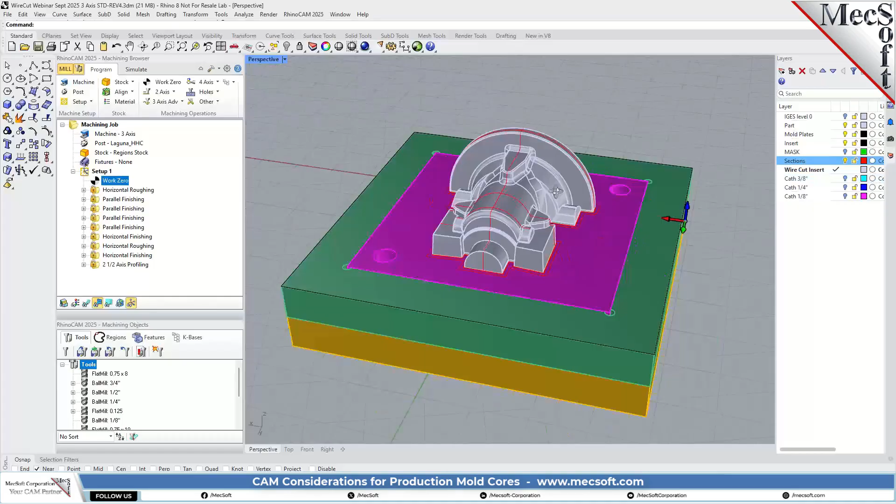Now you see that we have the same core insert. We have the insert plate with the core surfaces on top. We have the mold plates here, and I'm just going to hide those.

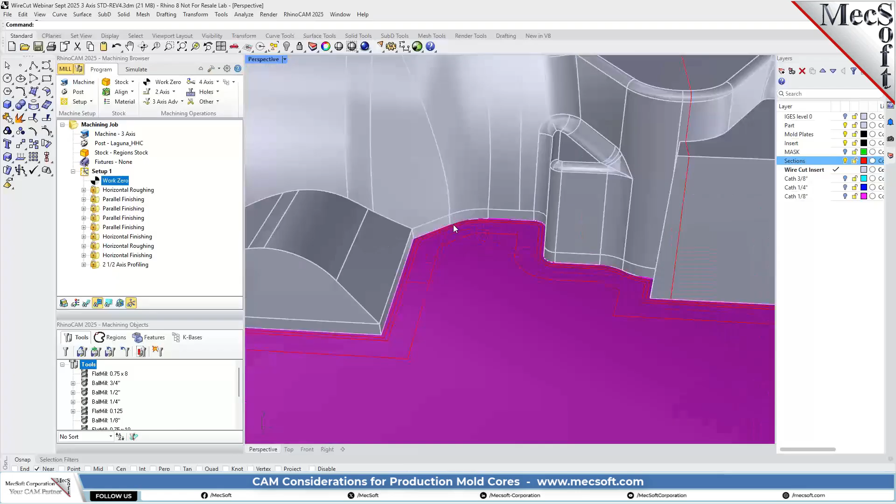Okay, so what will most likely happen for a production environment for this mold insert is that you really want to get a sharp edge there, because that's what the part requires at the parting plane or the parting line. So you really need to maintain that sharp edge. In order to do that in a production setting, you probably don't want to machine it the way we're going to machine it for the prototype.

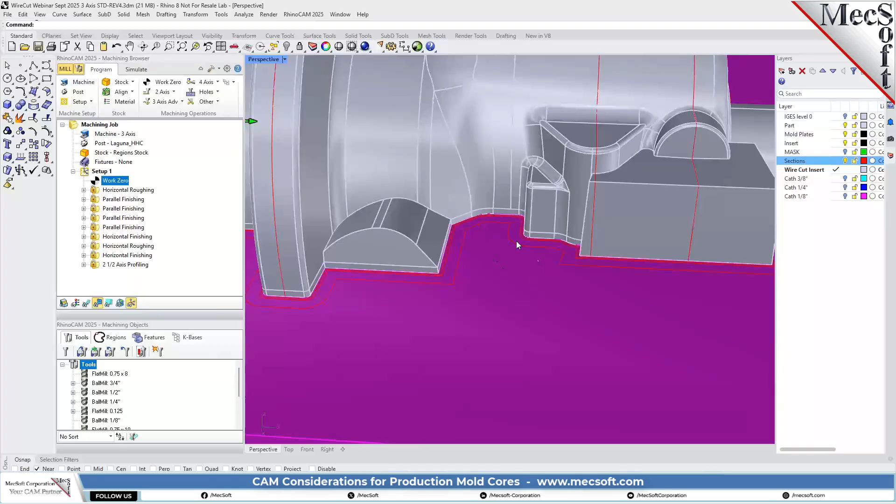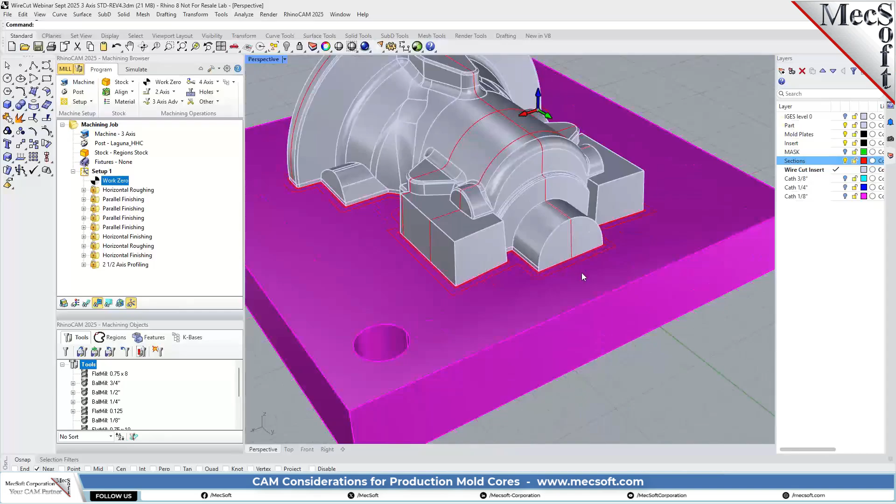So what they will probably do is wire cut that shape out. They'll mount the mold plate, or this is actually going to be a whole block, okay? And we'll probably wire cut. They'll probably drill a hole right here, since this is not a part surface, to feed the wire through, and then they'll wire cut it around. So let's take a look at what that looks like. I'm going to go ahead and hide this.

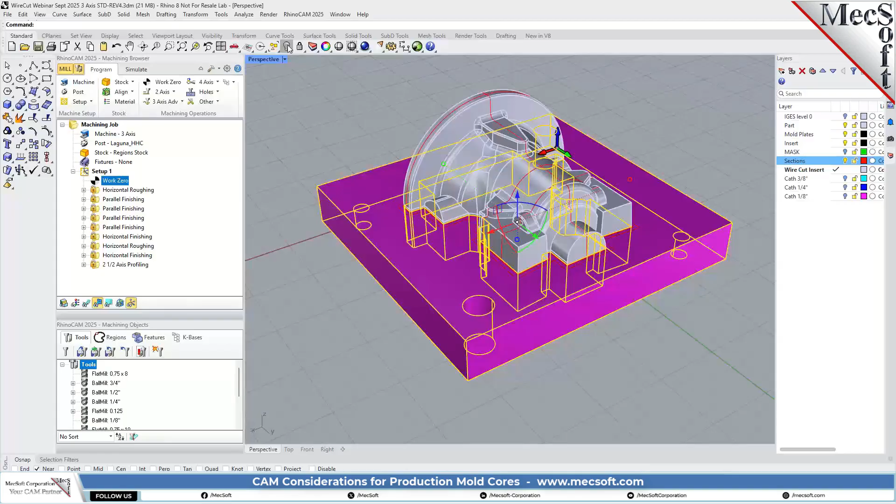Okay, so in most likely cases, when they wire cut it, anytime they cut anything in a mold shop, they're going to be cutting more than one. So they always cut in sets. In case something happens to one, they can use the second, or they may do 3 sets.

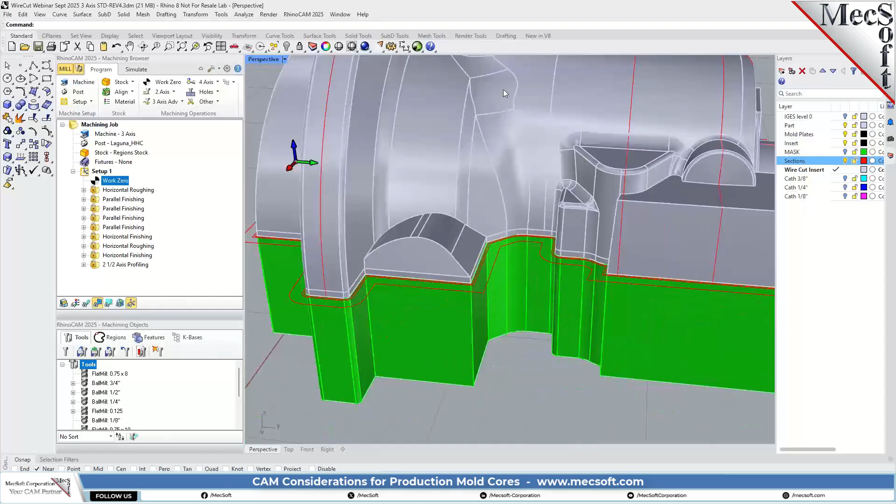Okay, so to get this sharp edge, I have it programmed out, but I'm not going to program it in this. I'm going to program it in the prototype. But they'll probably just machine on down as if this is a part surface, okay? And they'll just machine past this parting plane right here, which is no longer visible now. So one way they might do it, and the way I'm going to do it in the prototype, I've got a number of ball mills, starting with the 3/8, a 1/4 inch, and a 1/8 inch ball mill. So we're working it down.

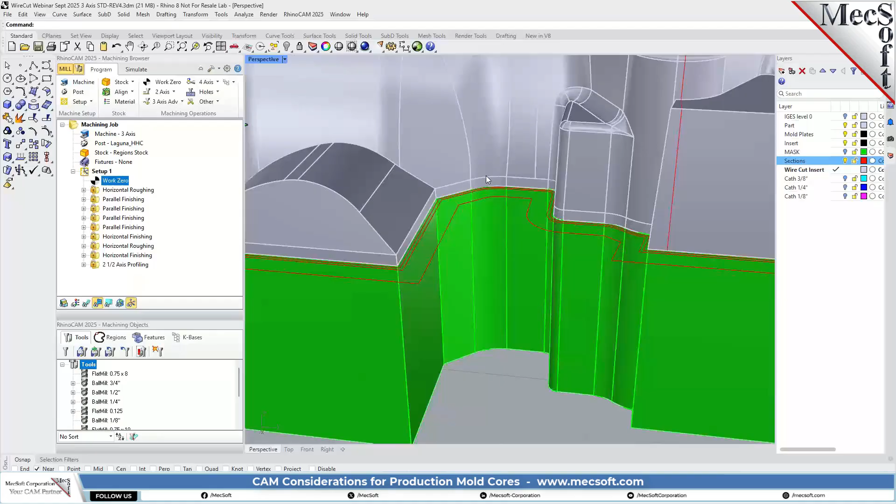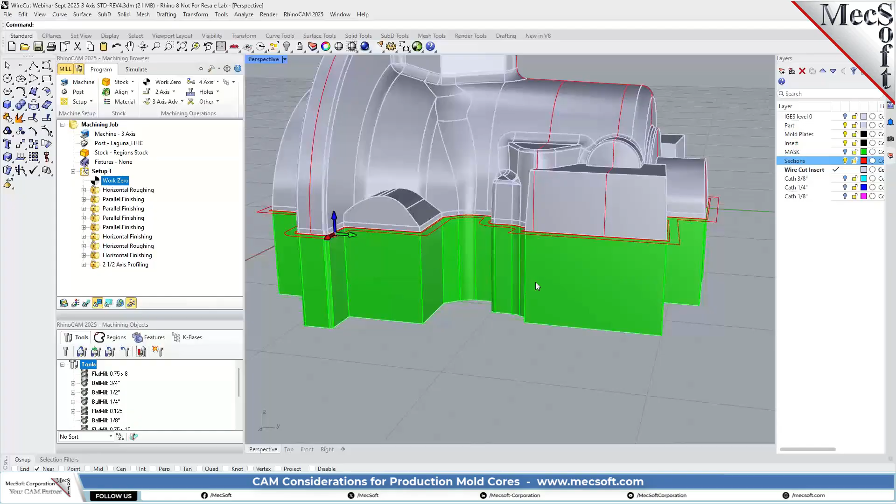So one question you may ask yourself, do I want to machine down to this? You can consider this a fixture, okay? Because that's the wire cut part of that mold plate, and your core is going to be mounted on that. So they've got a couple of pins here, which will align it with the core, and then you have some fasteners, cap screws that actually fasten it in place.

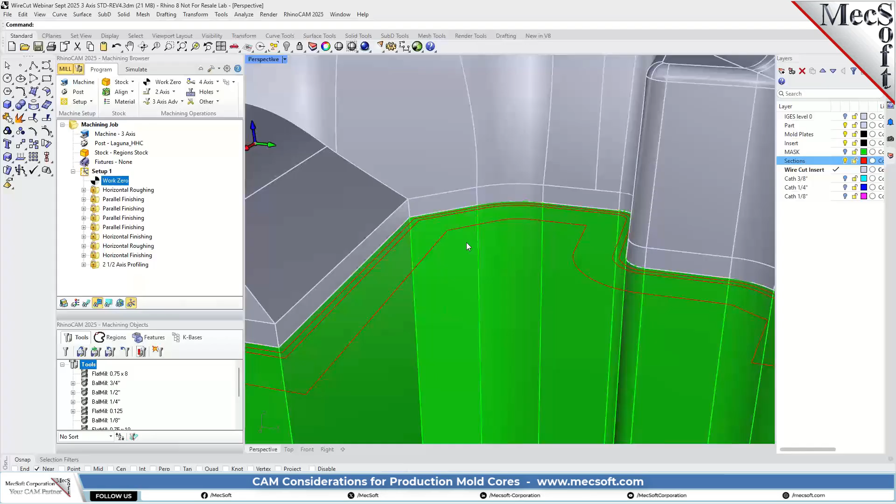So if you're only machining one set, then you really want to pay attention to how you're going to machine at this parting plane. You can consider this a parting line, even though it's a parting plane, because you do have a line between the fixture portion and the core portion. So you may not want to have the tool actually run down on this fixture. You may want to maintain the tangent of the ball mill to stop at the actual parting line.

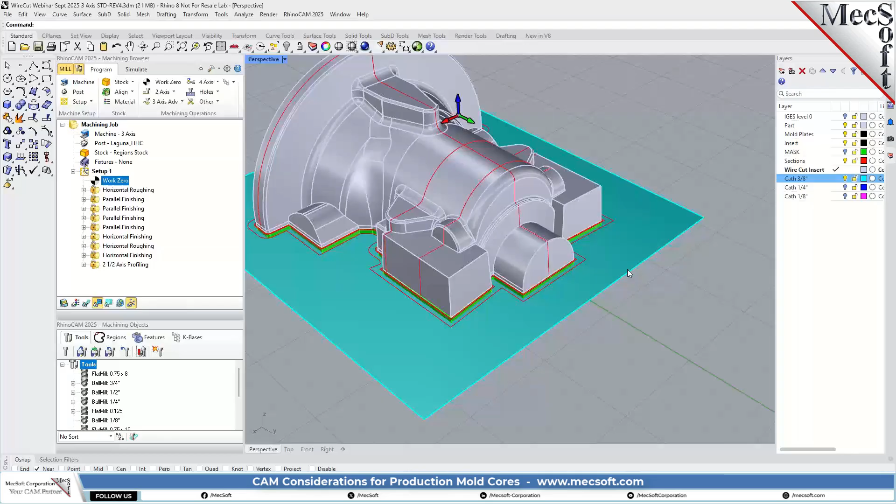Okay, so in order to do that, an easy way is to use catch planes. You may have seen us do this, or you may have done this for a number of purposes. In 3-axis machining, every surface that's visible is taken into account when the tool paths are calculated. So if you have a surface here that's visible, the tool obviously is going to stop on that surface. It's not going to cut below it. As you can see here, we got some offset curves we're going to use for different tool sizes.

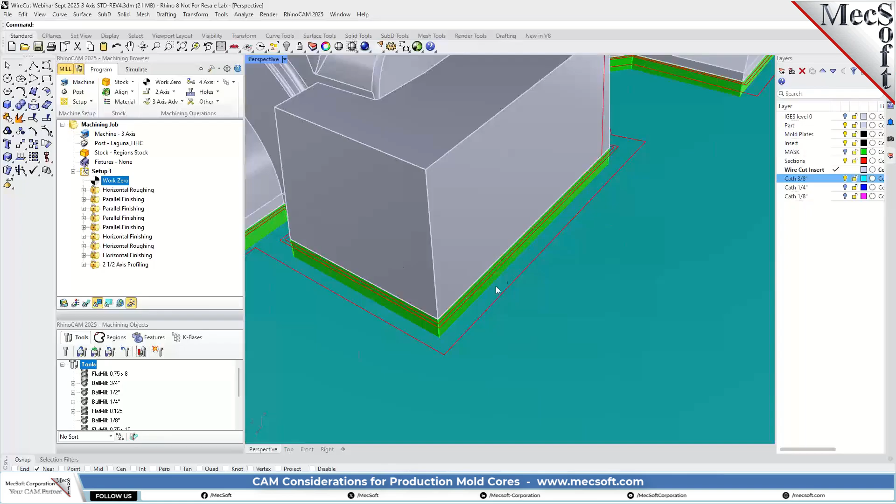So this catch, spelled catch wrong, Cath 3/8, means the 3/4 ball mill is going to stop on this plane, which is 3/8 of an inch below the parting plane. So it's a 3/4 inch ball mill, and the tangent of that ball mill with this catch plane is going to hold that tangent right on the parting plane. Okay, so you got different planes for different ball mill sizes.

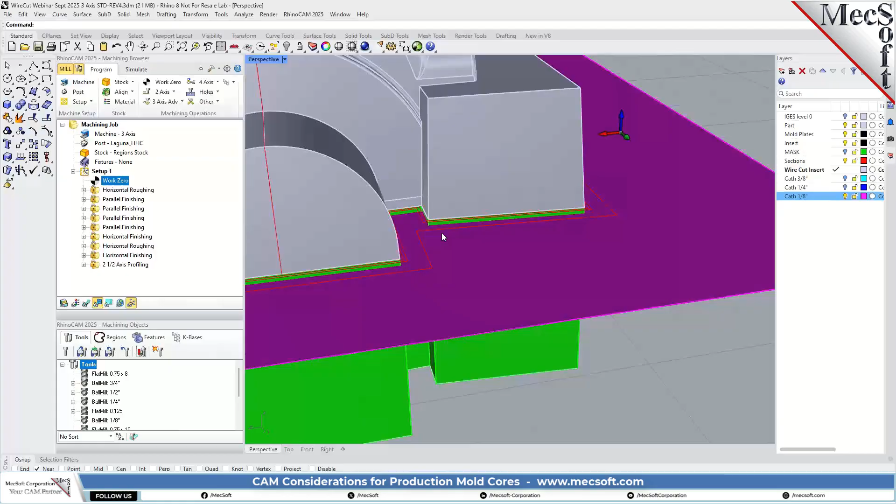So we got a 1/4 inch. Okay, so this is a 1/4 inch below the parting plane. This is going to be using a 1/2 inch ball mill, and then we have another one for a 1/4 inch ball mill. So they're in just different levels, which keeps the ball mill tangent to the parting plane.

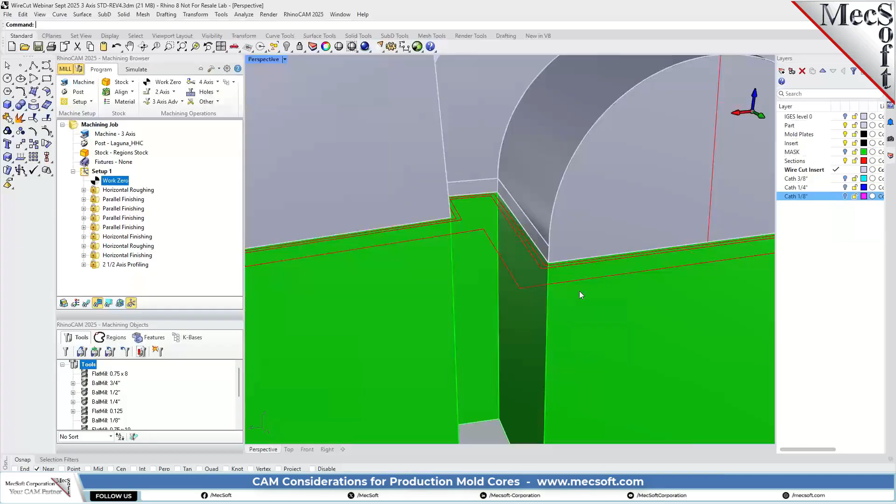Now, if you're wire cutting out more than one, which is actually what will happen, you can just ignore this method and just machine down, say, a half an inch below this, like in a horizontal finishing operation, to match this profile, and it'll give you a nice sharp edge right there. Okay, I just wanted to go into that so you'd understand the different ways you might want to approach this particular insert.